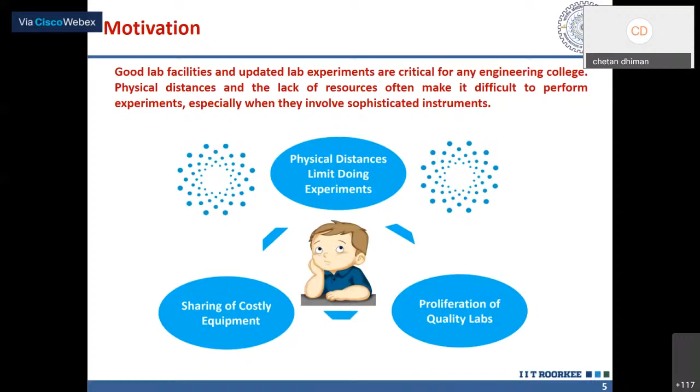So to overcome all these problems, we will try to provide an environment in which the physical presence of our user is not required. So the objective of a virtual lab is to provide our user remote access to labs in various disciplines of science and engineering.

Also, as you all know, a physical lab comes with a constraint of time. It means a student or user is only able to perform an experiment within a limited number of times and limited repetitions. But in a virtual lab, a student is free to learn from their own pace and from their own place.

It means a student can perform the experiment 1,000 times without the constraint of time, situation, or place, until they get the basic idea or fulfill their exact goal of knowledge from a particular object or theory material. So our lab is available 24/7, and a student can perform these experiments 1,000 times.

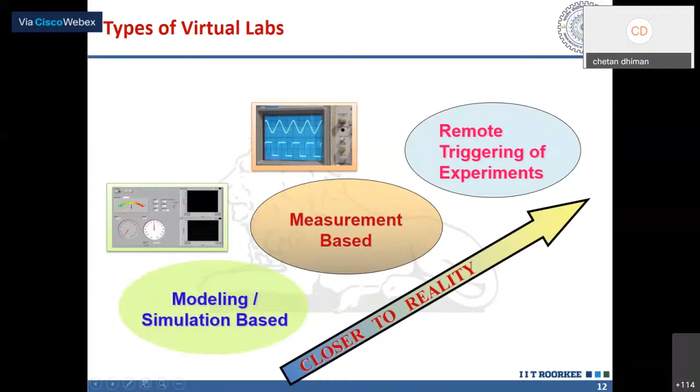Here you can see the screenshot of our simulation based virtual labs, which comes under civil engineering. Here you can see this type of environment we will provide to our user, and the plane table with instruments like alidade and tripod. In this environment, our user can perform the experiment virtually without going to the real world.

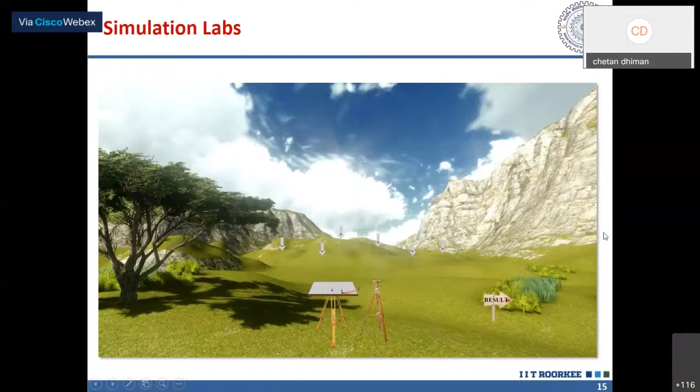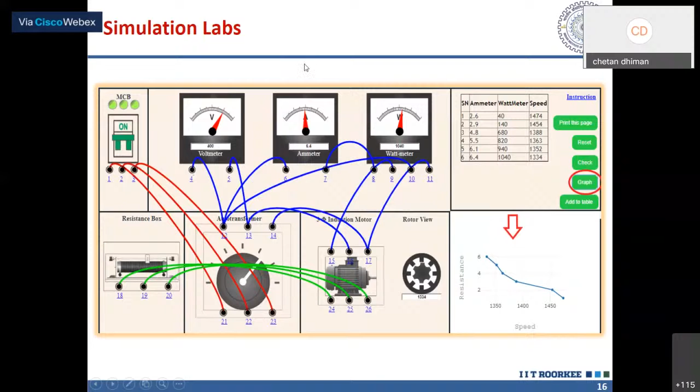Here you can see the simulation of an electrical machine. You can see the voltmeter, ammeter and wattmeter here, and other motors and parts involved in this particular experiment. A user can make the connections, perform the experiment, get the reading, and plot the graph according to their reading. So this type of virtual lab is a simulation type of lab.

The national impact of our virtual lab is that till now we have around 1100 nodal centers across India, just like yours, and till date we have run approximately 1600 workshops and webinars, in which around 2.5 lakh students and around 3.4 lakh users have accessed these labs and attended these workshops across India, and we will try to touch each and every student in upcoming days.

So our outreach team is continuously working to cover up all the areas where we have not yet developed our virtual lab, to cover all the curriculum and touch each and every student in upcoming days. We monitor our progress and our work on a daily basis.

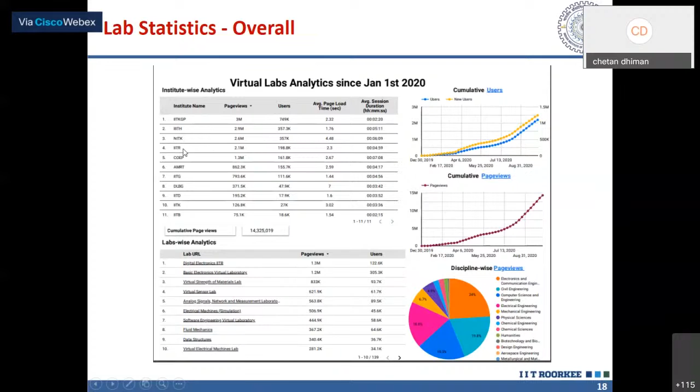So here you can see that in overall user experience, our IIT Roorkee virtual labs comes in 4th place. But when we discuss it experimentation-wise, here you can see that in the top 15 experiments, our 12 experiments are in the list, developed and maintained by our IIT Roorkee team.

So here you can see that the truth table gates experiment developed by our IIT Roorkee team has the greatest number of users, around 40,000. We try to rectify and improve ourselves on a daily basis. We maintain a daily analysis of our virtual labs so that we provide our students the best experience and rectify all our faults.

So now how can you access these virtual labs? A user only requires a PC with an internet connection, so that he just types the URL www.vlab.co.in in their browser. He will get the first page of our website, on which he will find all the necessary information regarding virtual labs and the list of experiments.

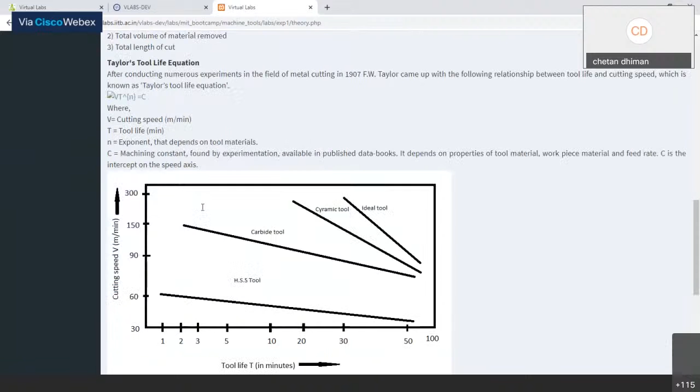Then we have a pre-test. The functionality of the pre-test is that before performing this experiment, if you are a new user of this virtual lab, we have some questions for you to check whether you have basic knowledge about the experiment or need to revise the theory part. So just perform this pre-test and check your knowledge once.

I'll click randomly for the questions, and then we have the evaluate button. The first answer is correct while the others are wrong.

Now to our procedure. This is very important for the first time user to perform the actual experiment. When performing experiments in our physical laboratory, we have to do it very precisely, because in each mechanical experiment there is a large amount of risk, both for our health and for the equipment. So before going to the particular experiment, just follow the procedure.

Then we have the simulation. This lab was designed because in the machine tools lab we have actual machines available, but here we are not able to perform the experiment with an actual machine. So we provide questions based on our machine tools, and by answering these questions you are able to perform the particular experiment.

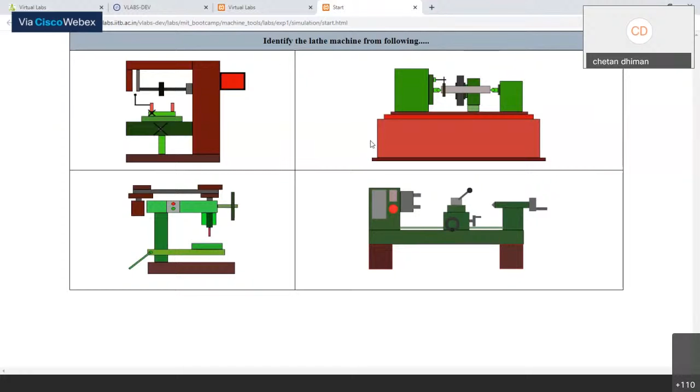This is the first question: identify the lathe machine from the following four machines. If I press a wrong answer, it shows me that my answer is wrong. So I'll click on this drill machine, and it shows that I have not selected a proper machine. Okay, so we know that this is our lathe machine, so I'll click on this, then we move to the second part.

The second question is to identify the parts of the lathe machine. We have this lathe machine with different parts available. These parts come up at random, not all at the same time, but in a random format.

So I have to click on the actual part and then on the machine, the placement of that part, and it shows me whether the answer is correct or wrong. Like the headstock, I think this is the headstock of our machine. Then the tailstock, so this is the tailstock of the machine or lathe machine. Then we have the bed.

I'll click here and it should tell me to try again, select bed, because this is not the bed. So this is the bed. Then the carriage, this is the carriage. Lead screw - the rod connecting the headstock and the tailstock is the lead screw. And tool post, so basically this is our tool post, and spindle, basically this is the spindle, and the legs, these are the legs.

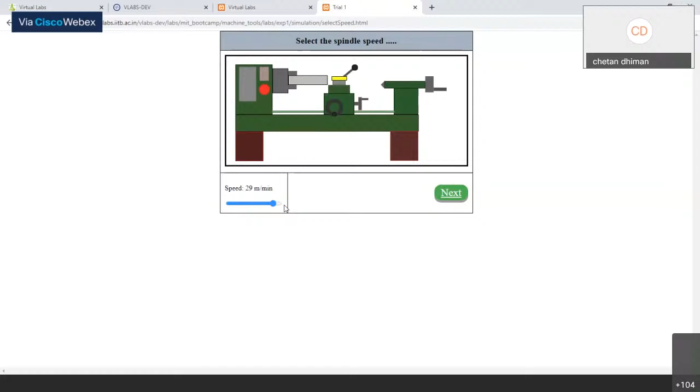Now we have another question: what is the necessary condition for turning? First option: material of workpiece should be harder than the cutting tool - meaning the tool is not harder than our material. If this is true, the material will never be worked, so this is wrong. Second option: cutting tool should be harder than the material of work - this is correct, because if the cutting tool is harder than the material, it will properly work. If they are of the same hardness, there may not be proper work done. So the second option is correct. Click on next.

Now we have to find out the Taylor's tool equation. What is Taylor's equation? V into T raised to the power n is equal to C. Click on next. Now at the last, we have our observations like cutting speed, the tool life exponent, and machine constant, and we have to find the Taylor's tool life. Just calculate with the help of the formula, put it here, and check your answer.

So basically this is the first experiment, and in this first experiment we revise our first year of workshop - how we are able to use the workshop experiment and what are the different steps to perform the particular experiment and what are the different parts of a particular machine. So basically this is a very basic experiment available with us, this is from the first experiment, and I'll show you once again that virtual lab vlab.co.in is a place where you can get each and every experiment available, and you are able to perform the experiment by following the procedure.

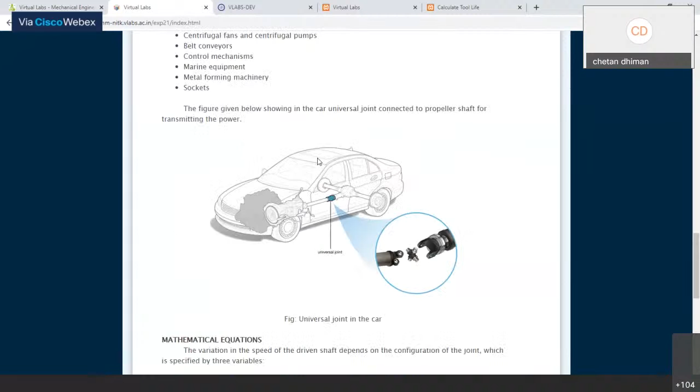We have the lab manual here again, with the theory and the objective. This is the complete theory. Once you check the theory completely, go to the procedure. By following the procedure, you're able to perform the experiment virtually as well as in your actual laboratory. These are the questions for self-evaluation, which you can also check. Then we have the simulation.

Initially, when we perform this experiment, the two shafts are rotating - one is the input shaft and the other is the output shaft. The output shaft was inclined at a 14-degree angle initially, and the input shaft has an angular velocity of 0.5 radians per second.

In this experiment, we have controls and values according to input and output available at the bottom. You can pause the experiment and fill in the values of beta, theta, and omega. Let's fill the value of theta as 180, and just play that - you can change the value of beta and omega from here.

As you click on the show graph button, the graph between the output shaft angle and input shaft angle is available, and the graph of output shaft velocity versus input shaft angle with degree is also available. So you can change the values and check the different changes in the graph.

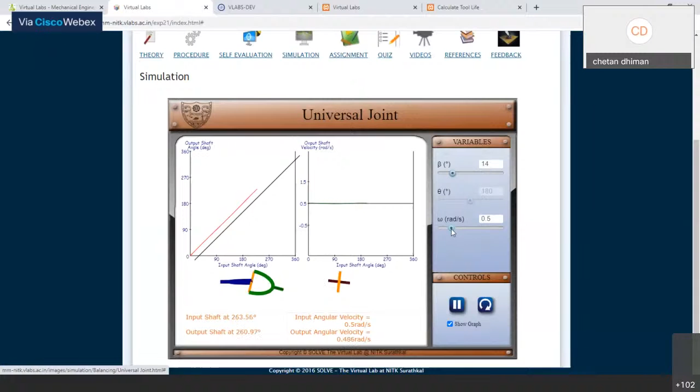We have another experiment in this lab as well - you can check that too: the crank and slotted mechanism. This is the second-last experiment, the crank and slotted mechanism of this virtual lab.

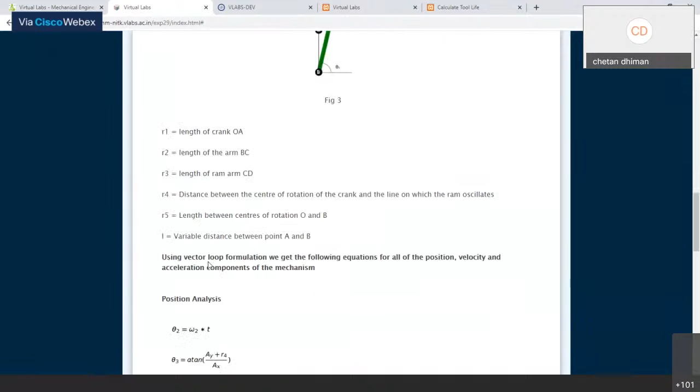A similar environment is available here, with theory and procedure. First, you have to check the theory - this is the complete theory for our mathematical crank and slotted mechanism. Then we have the procedure, where you are able to check the vectors as well as the angular velocity readings of this crank and slotted mechanism.

As I click on the simulation, we have this arrangement available - this is the mathematical arrangement of our crank and slotted mechanism. We have the values OA - this red arm is OA, the green one is BC, and the black one is CD. We also have the input angle theta.

We have values of velocity in mm per second, in the ratio of 0 to 0.8, and also the acceleration diagram available at a scale of 1 to 0.5 and 1 to 1, in both clockwise and anti-clockwise directions. You can make changes in this experiment, note down the values, calculate them on paper, and check whether the results match or if there are errors.

I'll change the values of OA, BC and CD, and also the input angle at random, and click on start. It shows the vectors VA, VE, VC, VB and VCD, and the values are continuously changing.

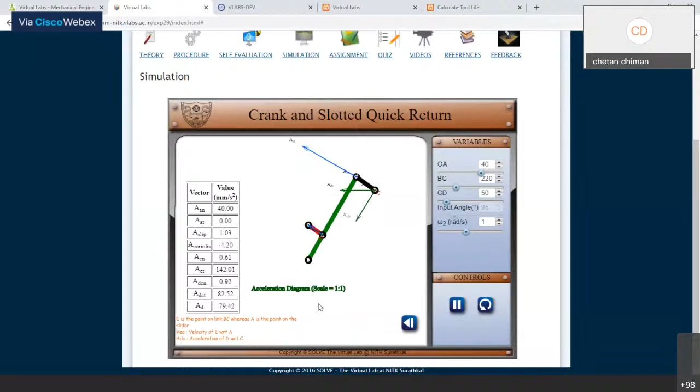And also the acceleration diagram, we have the different components of the acceleration diagram in the form of vectors available, both for the clockwise direction. We have the different angular velocity and acceleration diagrams, and also the velocity diagram available here. So basically this is another basic experiment available in this particular mechanical engineering.

So now let's move to a third experiment. In the third experiment, I'm going to demonstrate the experiment from the Machine Dynamics and Mechanical Vibration Laboratory. And this is the experiment, and we have some of the experiments available.

So the first experiment is for free vibration of cantilever beam. I'll click here, the free vibration of cantilever beam. So for the first time user, just revise your theory and procedure, check the procedure.

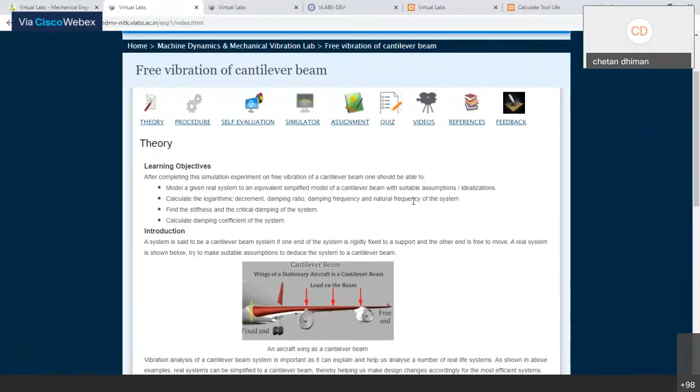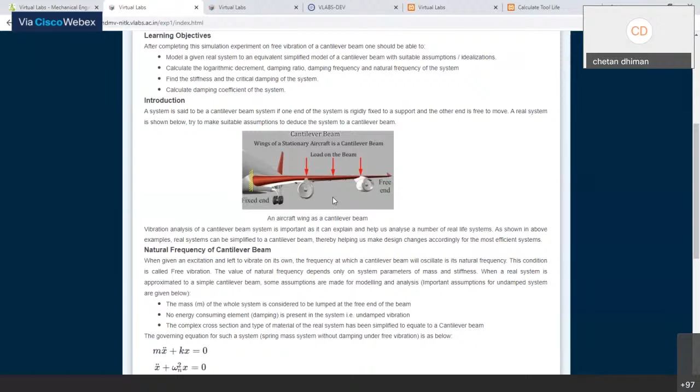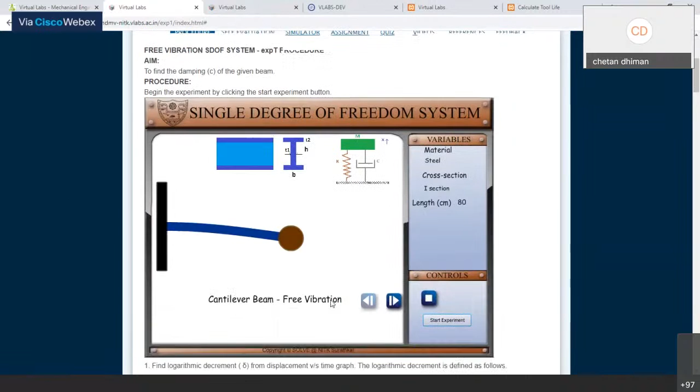So in this particular experiment, we use the stationary aircraft wing as a cantilever beam and perform the experiment. For example, we use these, and these are the calculations. Just check the theory once, and then we have the procedure. This is basically the procedure of our experiment. Just check this particular procedure and follow it to perform the experiment.

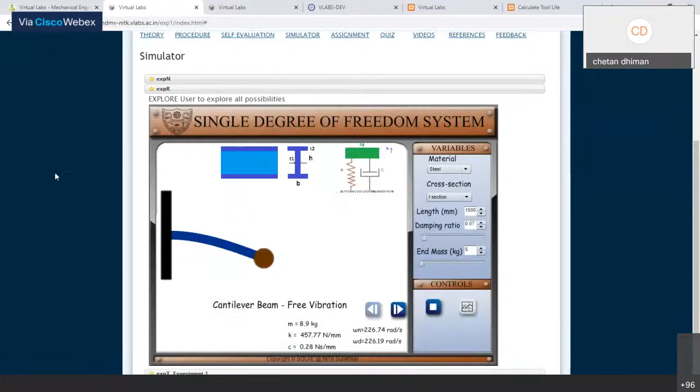So basically in this particular experiment, the cantilever beam is available here, and this is the beam section, and this one is the spring-mass damping system. When you take the mouse to any component, it shows the statistics of that particular component and the dimensional statistics of this beam.

And here in the controls, you are able to change the value of the material - steel, aluminum, and bronze. Then you are able to change the cross-sectional area of the load, like T section, C section, L, I, square section, and in the other section you are able to provide your customized values to this particular load.

And in the end we have the end mass. So in this particular experiment, as I choose the steel as the material, then we choose the cross sectional area. We can choose this as a T, then C, and the component characteristics are also available when we place our mouse to this particular load material.

Suppose we choose this as I, and we have the length in also. You can change the value of this particular length, let's say this 2000, and then you can also change the damping ratio and the end mass of our cantilever beam.

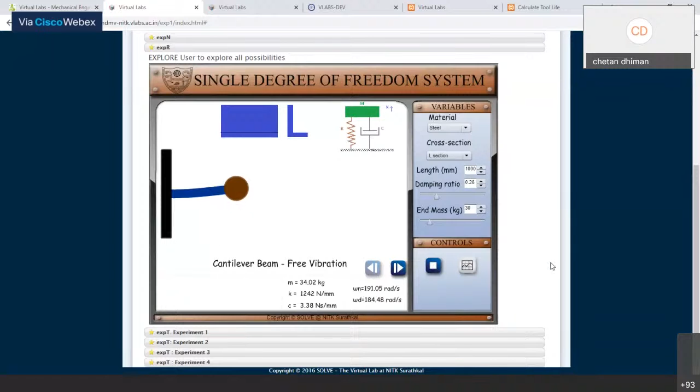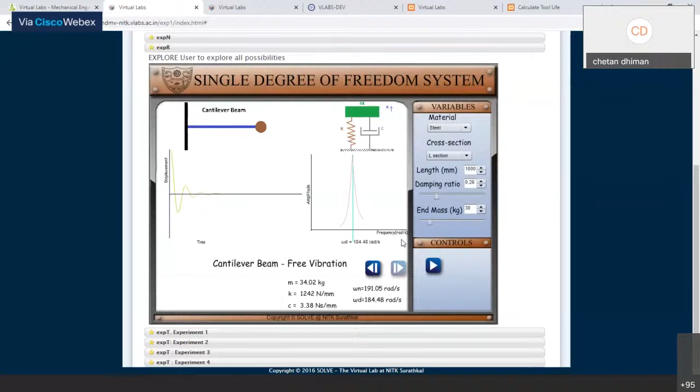As you click on play, it's basically the windows available for this particular single degree of freedom system. So this is the third experiment of our virtual lab which we are going to show you, and you can also check any of the experiments available in this particular field.

The best and easy practice is to just go to the procedure, follow it, and perform the experiment. For performing the experiment, it is not necessary that you are from mechanical or industrial engineering only. You have the freedom to perform the experiment from any branch. If you want to perform an experiment from civil engineering, just go to the civil engineering branch and perform it. And if you want electronics engineering, just go to that section and perform the experiment you want.

So what is the best utilization of these experiments? According to me, and based on feedback from students, when you are going to perform the particular experiment in the actual field, as first-time users, you don't know how to use the experiment, how to use the kits and equipment. Before reaching the mentor of your college or lab in charge, you basically waste time, because in your college there is a group of 5 to 6 persons, and it takes time for the mentor to reach every group. So once you perform the experiment on virtual labs, and then go to the physical laboratory, you at least have the basic knowledge about the experiment.

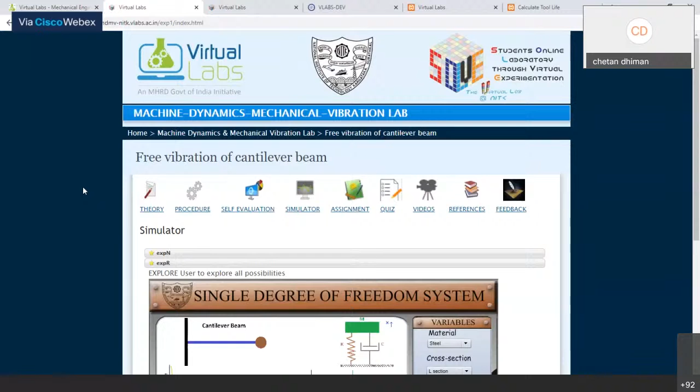So guys, these are some of the basic experiments available in mechanical engineering on our virtual lab platform. Now if you have any query, you can ask, or we will move on to another experiment.

Also, in this particular virtual lab, we have a very well set up and good lab of fluid mechanics. You can also check that lab in the fluid mechanics section. Just go here and search fluid mechanics lab. In that lab, you have 4 to 5 different experiments, but they are very good experiments if you go and perform them on your own. So you can check those experiments also.